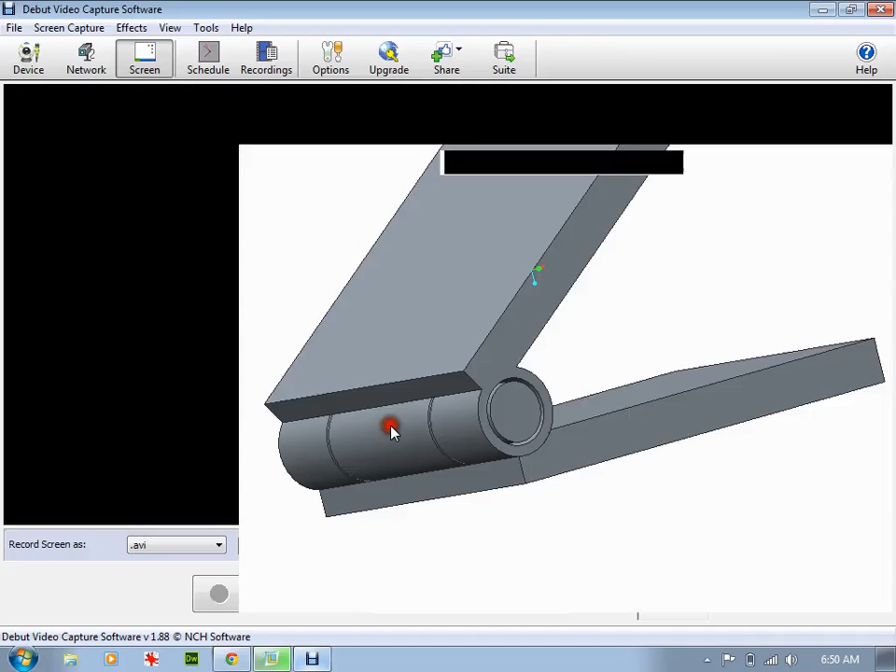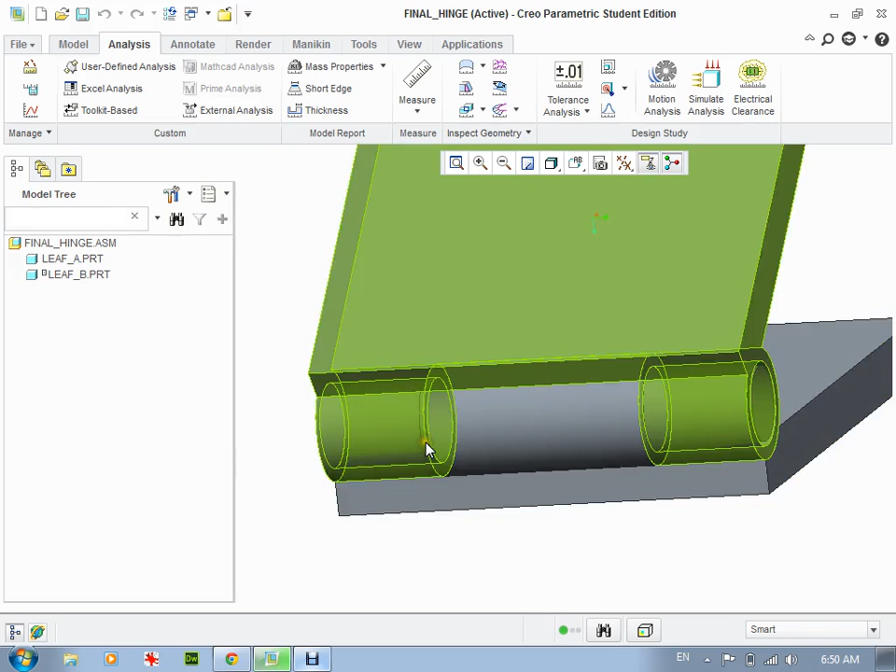This is the second part of the hinge tutorial, basically a tutorial on how to fix a mess up. If you zoom in here, you can see I've got a gap so the hinge can swing, but I realized afterwards when I did my math that these two lines are overlapping each other, so there's no way this is going to hinge. I've got to fix that.

So what I'm going to do, and also show you, is how to take a bit of material out of here so that it'll actually hinge smoother.

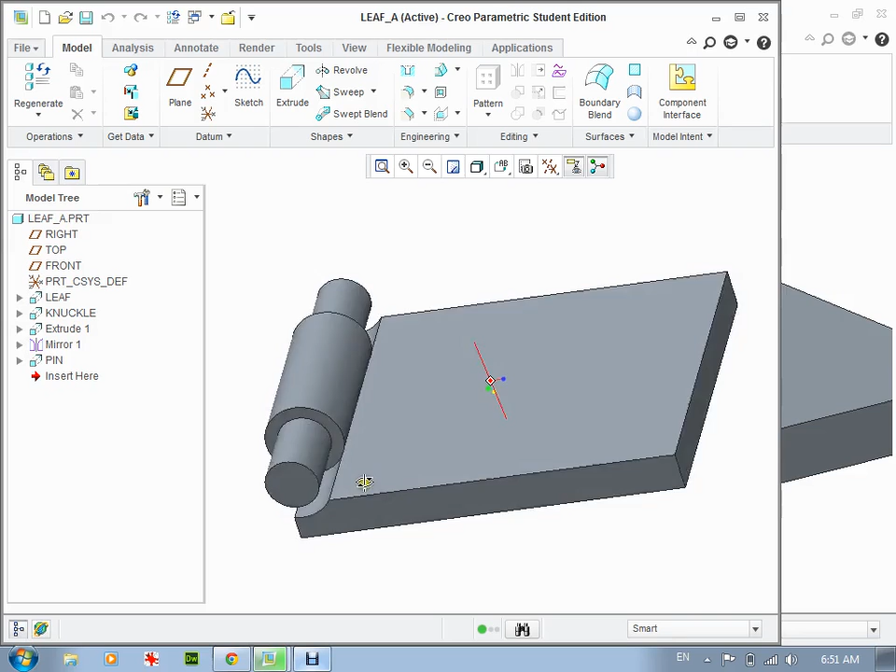I'm going to take the bottom part right here, click on it once, right mouse click, open, and simply fix where I messed up. I'll take this part, which is my extrude, right mouse click, go to edit definition.

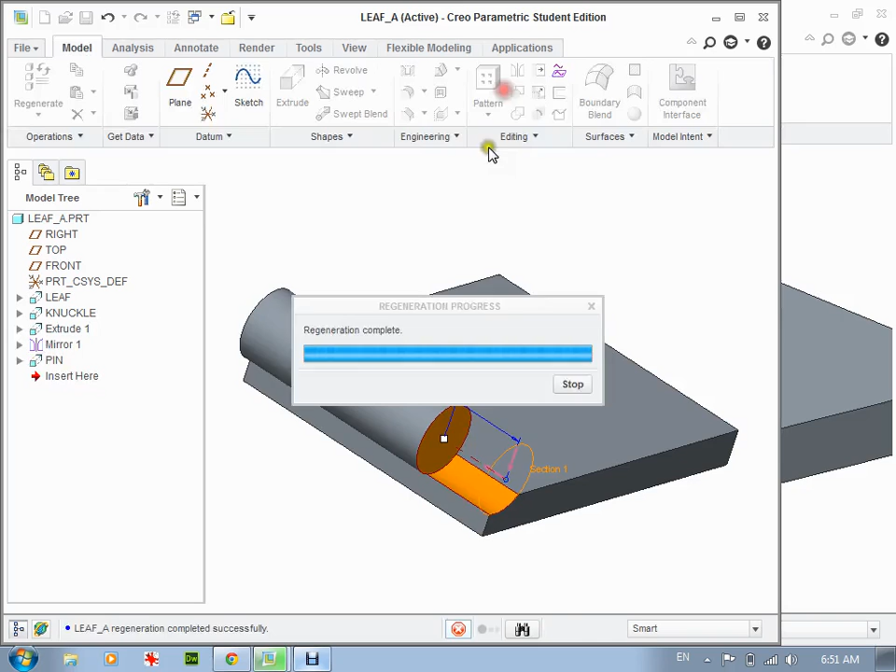All I'm going to do is change this down to, let's say, 2.6. I'm just going to take a bit more material off of it, hit OK, hit the check mark, and then save it.

Now when I close it, you can see I actually have a gap now. So that might hinge this time around.

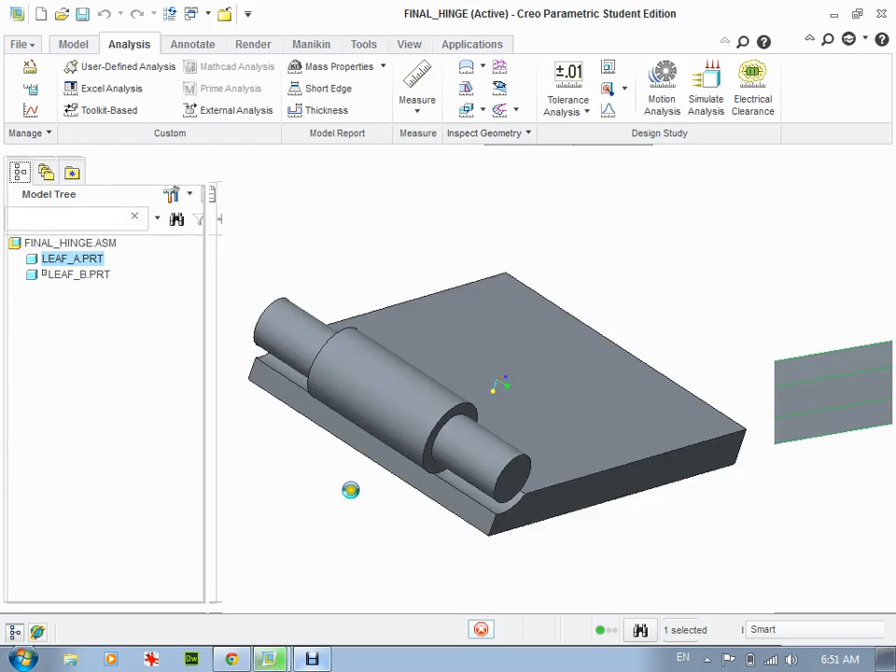The second part of this is I'm just going to take a bit of material out so that the bottom can actually hinge a bit. I'll right mouse click on this one, open. What you can see is I've got this part here that can be removed a bit more.

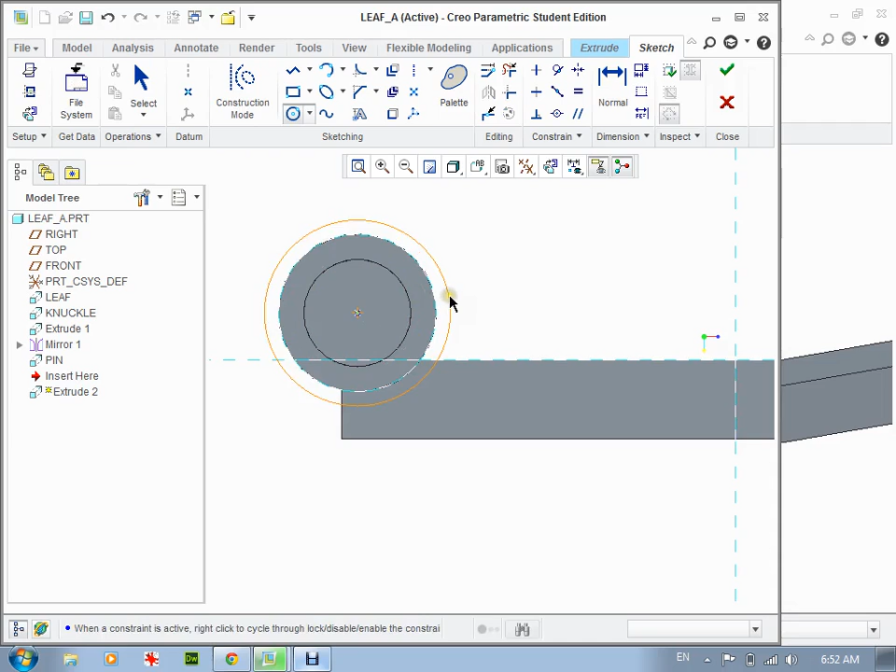To do this, I'm going to select this side, click on extrude, and go into 2D. I'm going to use this outside circle as the reference. I'll click on the circle tool, hold the Alt key down, click on this, and now I can draw the circle of the material I'm going to remove.

I'm actually going to do this twofold, and show you a couple little things you can do. I'll click on the first circle and create a second one. Click on it, and out I go—I'm just going to take a little bit off.

I don't know what the inside diameter of the circle is, so I'll go to normal, click on this, center scroll, and get rid of these constraints. I know the inside one is 0.13, hit enter—oh, that's my diameter, so that's 0.26. Sorry, that's radius, the diameter is 0.26, and that's 0.28. I'll leave it at that—it's about 0.01 difference all the way around.

Now I'm going to edit it. I could leave it like this, but I'll show you an editing tool. I'll draw a line here across this, hit the center mouse button to get rid of the line, hold the Alt key down to get a reference line there, and click across. Now when I select OK, I get all this different stuff.

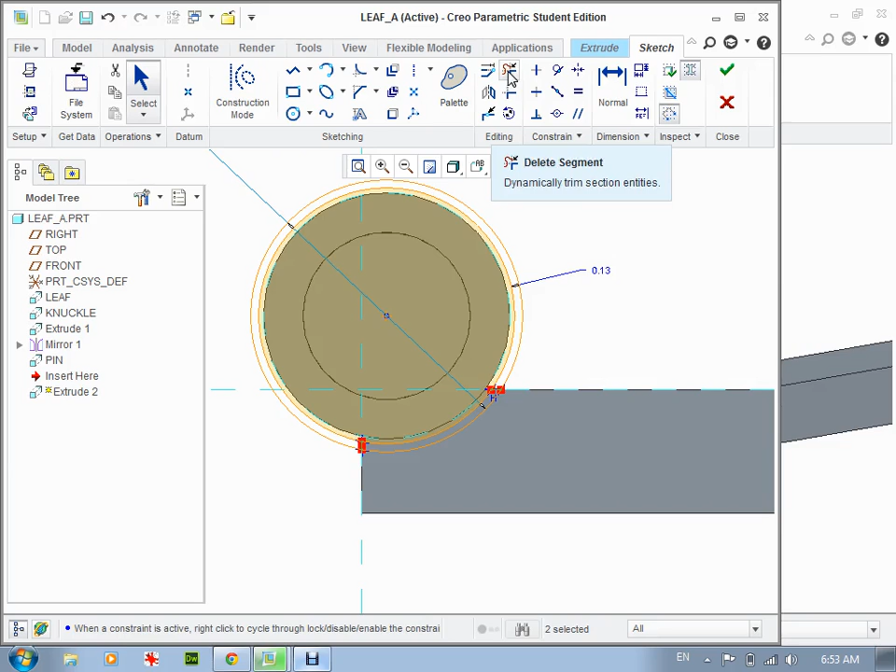There's a problem here, so what I'm going to do is remove or delete segments. I'll click on delete segment—I don't need this stuff, I don't need this stuff, I don't need this here. What I'm left with now is the part I actually want.

When I go select, you can see it's actually changed color. If you look, I actually did mess up because it's not on the line I wanted. So I'm just going to put another circle in here and get it to where I want, which is right there, snapped. You can see that I have a gap, so I'm just going to go back and fix this up to here.

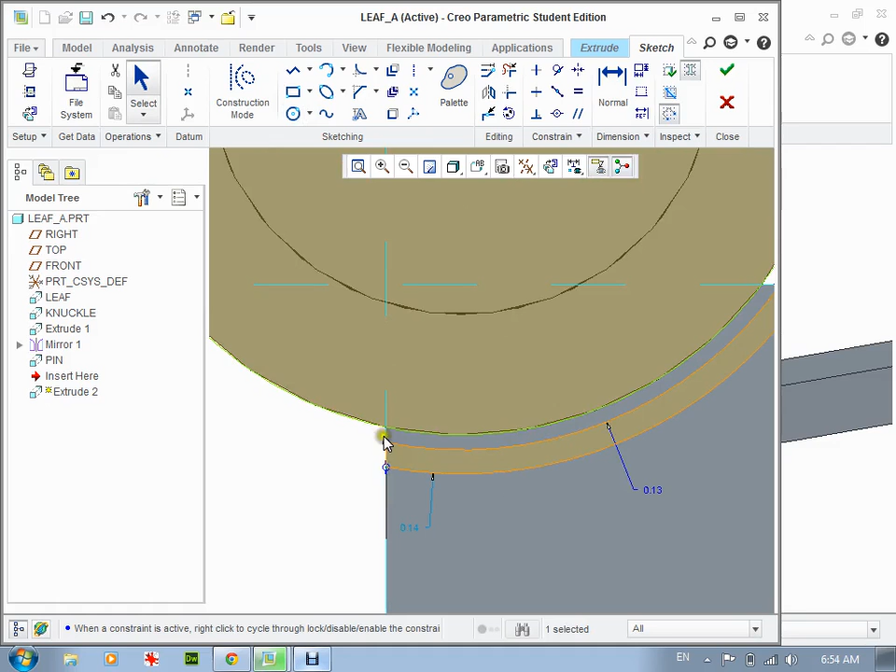And fix this one to here, then go back to delete segment, and I'm going to delete that bit, delete that bit. Let's go back out again.

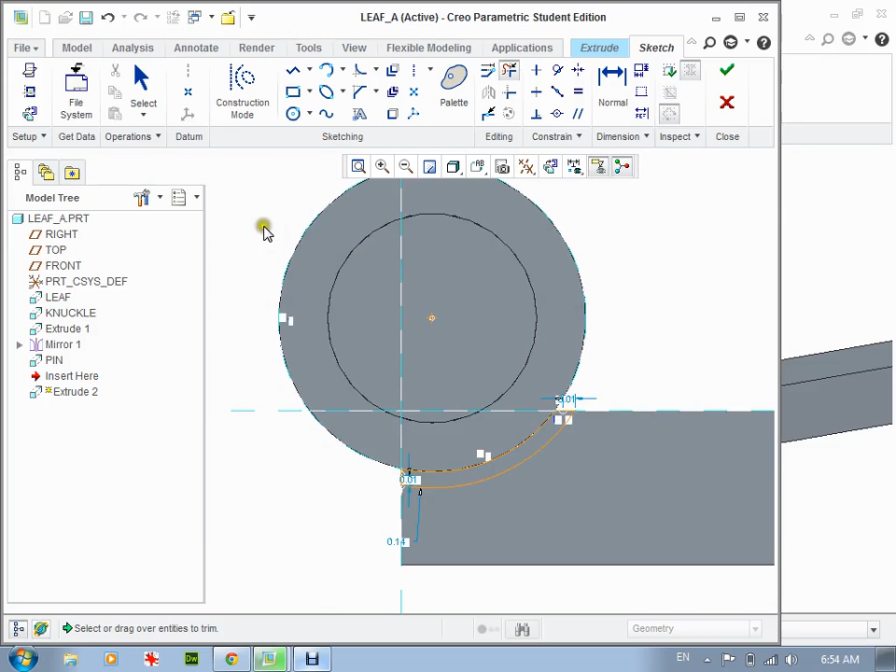Delete that, delete that, delete that. And when I hit select now, there's my bit or piece that I want to take out. Okay, so now I just hit OK, put it in, drag it over on an angle. You can see that I've gone the wrong way, so I'm going to reverse it, remove material. I've gone too far, so I know this is 0.26.

Okay, so I go that far, click OK, and I'm just going to turn the datum plane on, or the plane display, and then all I'm going to do is mirror that bit, because it's highlighted already, mirror it across this plane, select OK, and you can see that it's taking the chunk out over there.

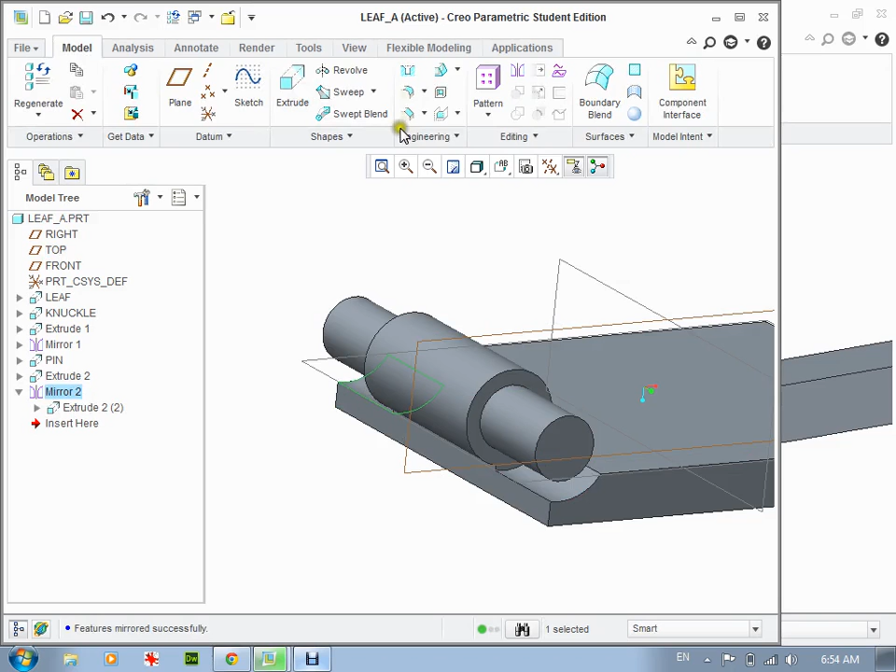So I'm just going to save this, OK, close it, and now you can see that I actually have some space now. So that would be a pretty floppy hinge. Okay, so I've got enough spaces in there. Maybe the last one I might want to do is on this piece, right mouse click, open, and again, there's this section right here that, why don't I take a bit out of it.

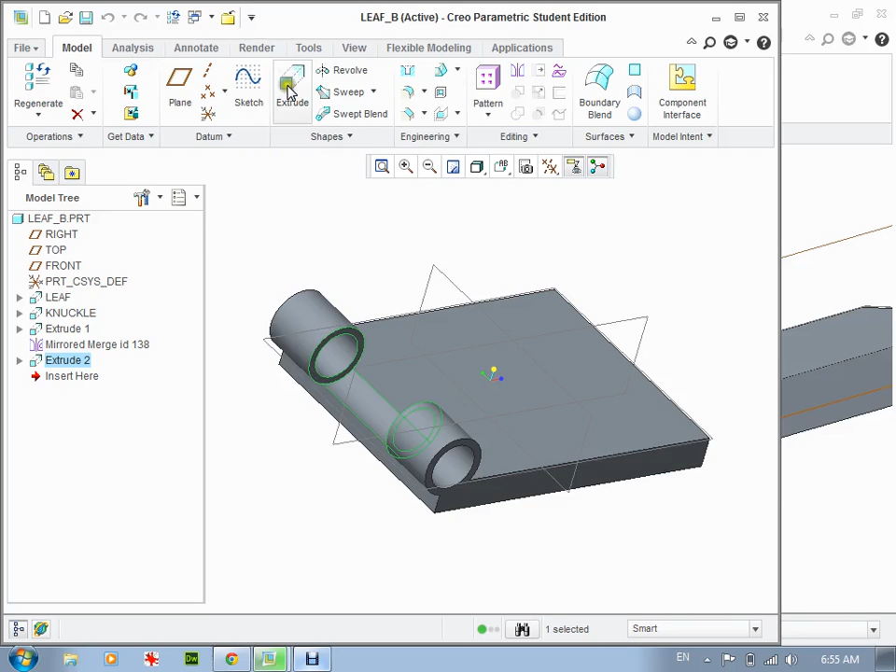So what I'm going to do actually is I'm going to work on this surface right here. Okay, let me just click somewhere else for a second. That surface there, extrude. Oops, didn't get it, so I'll pick that one now. Okay, and this one would be hard to work on from a flat on, so I'm going to work on it on an angle here.

Do a circle. I'll do it a different way this time. Alt key to pick out the outside of that. So I'll pick the center of it. Okay, and you can see it picking it. Click to it. There's my first one. Oops. Grab the second one, and I'm going to do that one just 0.01 a bit bigger.

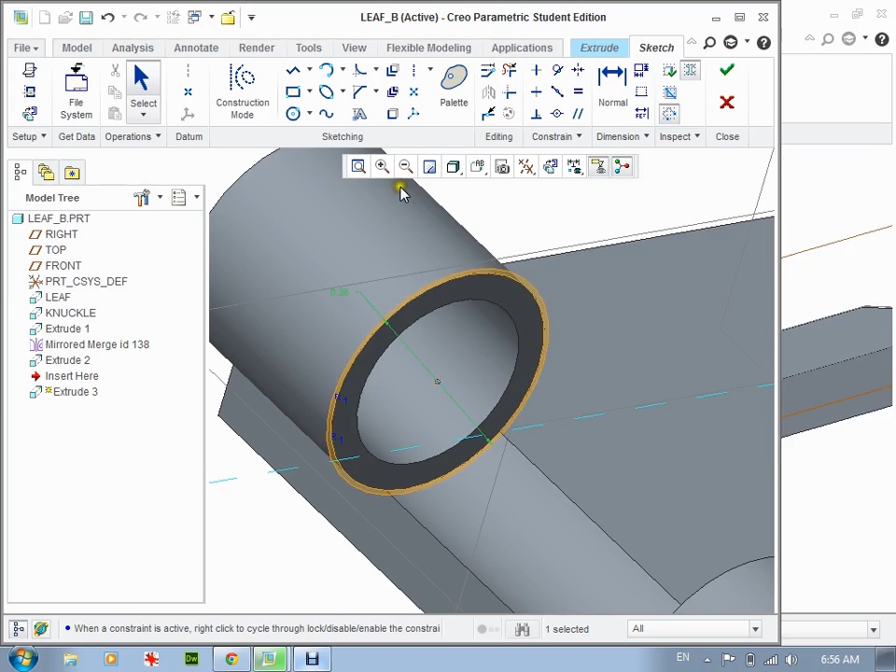Okay, so this time I know what the number is, so I'm just going to click it here. So 0.26. Okay, I'm going to leave it like this time. Hit OK. Now I got myself a tube. Okay, I know my tube is 0.5 long, and I'm going to remove the material. Okay, and all it does is just remove this a little bit bigger. It didn't touch anything else. Okay, click on OK, and I'll save it.

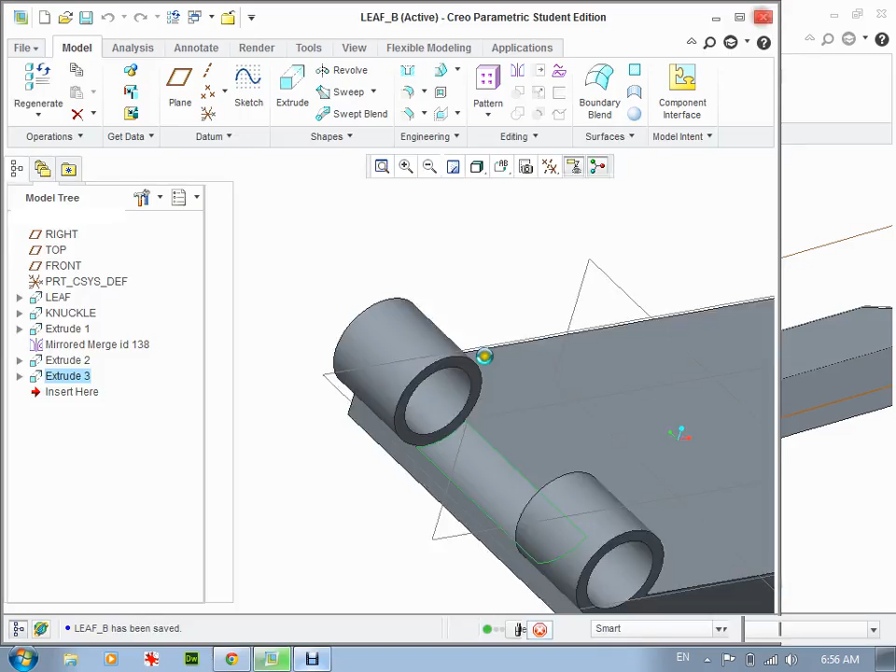And now when I close it off, you can see that I actually have space underneath there. Okay, and it's all there. Right, so that actually helps me out a bit better, and I'm just trying to get a good view of the other one. So there's a hole there, right there. You can see it right in there. There's a gap now. Okay, so that's basically the end of the hinge.

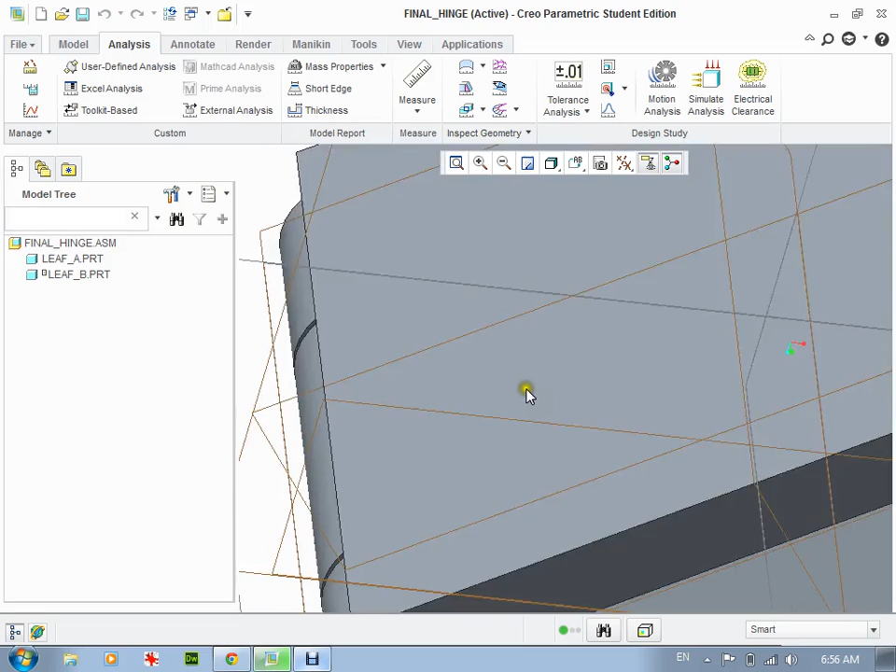This is basically just a tutorial on how to make a hinge. You might have to vary the dimensions on that a bit, but I would test print one. So the whole intent of this tutorial is that you would actually go and test print this out to Makerware. And if you haven't done it yet, it's pretty straightforward. So first off, I'm going to save the model. Okay, so I'll just get this to Makerware right now.

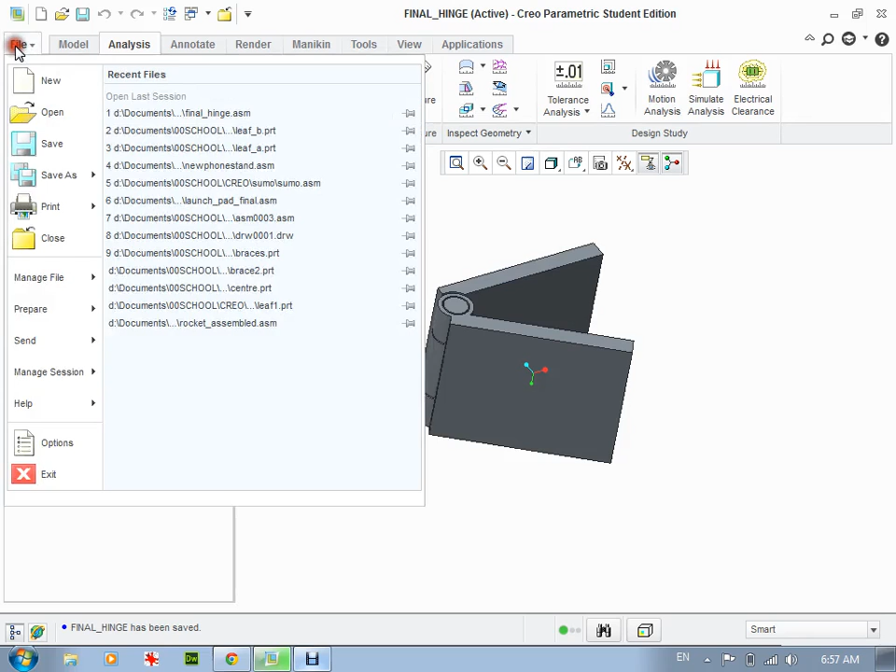I'll go File, I'll go Save As. Down here, it's not an assembly, it's a stereolithography file, an STL file. Okay, and it says Final Hinge. I've got one in there already, so I'm going to just name another one. So I'll call it number 2. Okay, under here, the only thing I do in Export STL is where it's highlighted right now, you just put 0. The program automatically fills in what the chord height is going to be.

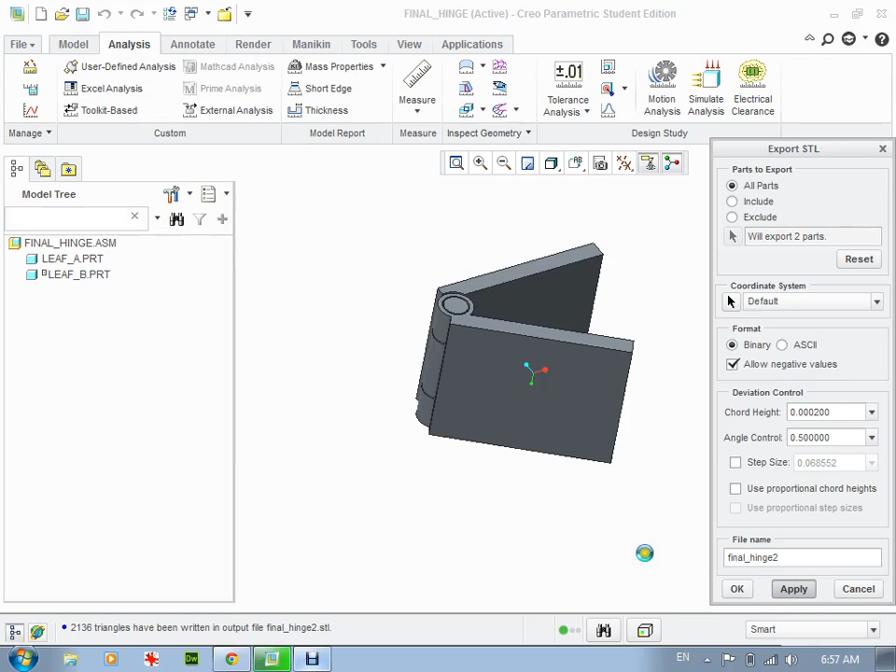Okay, and you hit Apply, and my computer all of a sudden just jammed up on me, and this is not good. And a fatal error. So I'm going to end this tutorial right here, and we'll have to catch up on the next part.